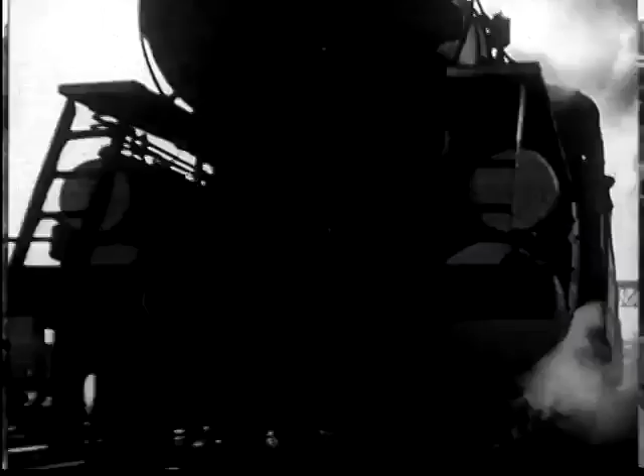Speed and still more speed. The breathtaking speed of the past is just poking along today. Faster trains, faster trucks, and motor cars speed up the work and play of the world. Each increase in speed follows the winning of a skirmish with speed's greatest enemy, friction.

And yet, strange as it might seem, speed is limited to our ability to stop, and stopping depends upon friction. What a paradox. Do away with friction for more speed, and yet for more speed, add friction.

Whether you travel on a bicycle, a wagon, or the fastest planes or cars, friction protects you, and your safety depends upon brakes, which apply friction for stopping. In modern busy traffic, on congested city streets, on the crowded highway, or in speeding along on the straight open stretches, the safety of men, women, and children depends upon brakes.

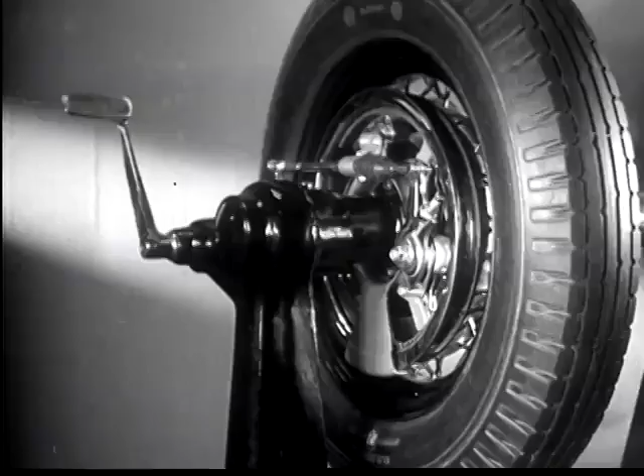No better example of dependable brakes can be found than those manufactured by the Chevrolet Motor Company. This is the Chevrolet wheel and brake. Notice how smoothly the wheel comes to a stop with the slightest pressure on the pedal, and how quickly the wheel stops when a sharp pressure is applied.

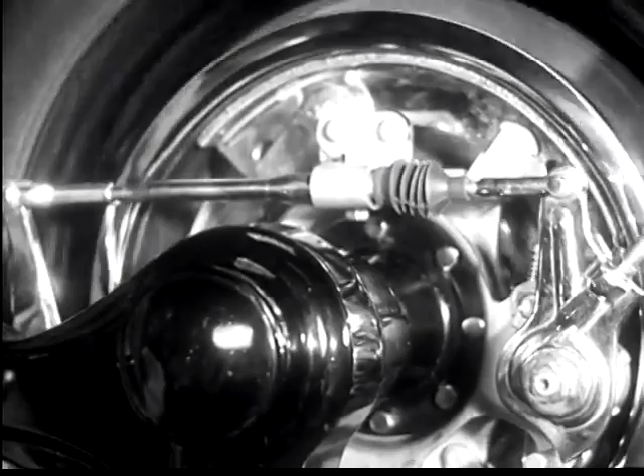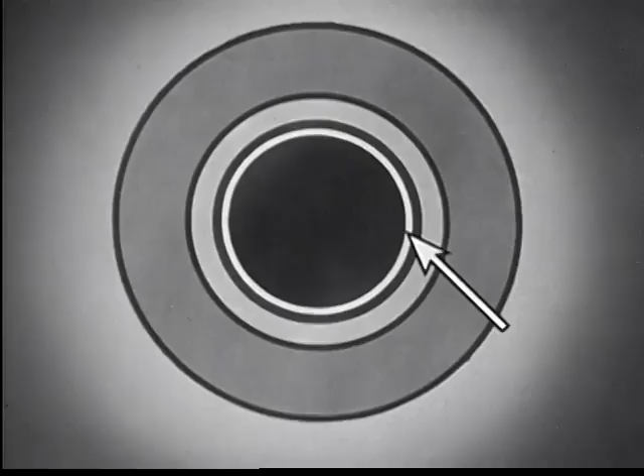Before we can appreciate the degree of perfection Chevrolet has reached in its brakes, we must understand how friction is used, what its habits are, and what must be done to take full advantage of it. This is a motor car wheel, and to this wheel is fastened a brake drum, the part to which friction will be applied for stopping.

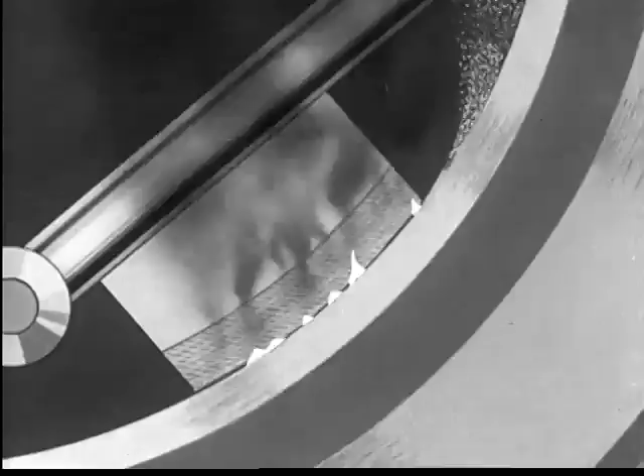Since friction produces heat, the material used for applying friction must resist heat. If it doesn't, it will smoke, char, burn, and quickly wear out. Chevrolet, with every available brake material to choose from, through exhaustive tests, has selected the very best for Chevrolet brakes. But regardless of the quality of the material, the way this material is used is more important.

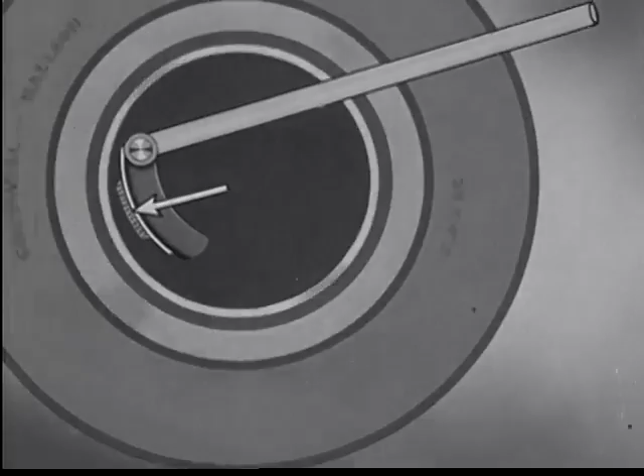For example, the amount of braking material in contact with the brake drum largely determines how long the material will last and how effective and safe the brakes are. Look at this. This motor car wheel is spinning and the brake drum turning with it. A short brake shoe covered with brake material will be used to stop this wheel. Now watch. See how hot the brake shoe gets and how quickly the brake material is ground away?

The brake shoe is lengthened. The brake shoe doesn't get so hot, and the brake material lasts longer. A still longer brake shoe, less heating, less wear. And now, almost half of the drum is covered with friction-producing brake material, and the wheel is brought to a stop with very little heat or wear.

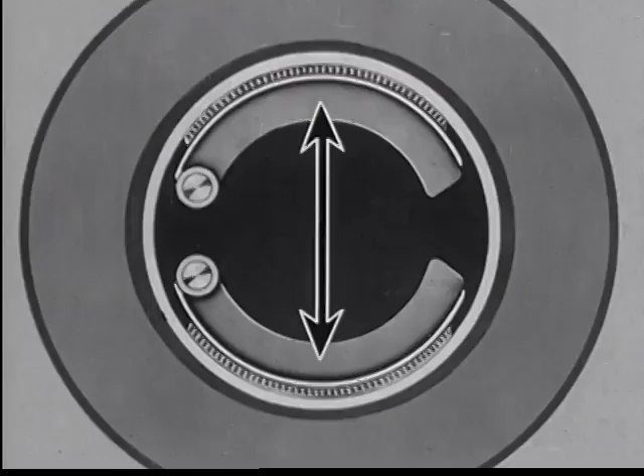It is a simple matter to see that the effectiveness of brakes and their durability depend to a large extent upon the amount of braking material in contact with the revolving brake drum, and the amount of braking material in contact with the brake drum not only depends upon the length and number of the shoes, but upon the diameter and the width of the brake drum.

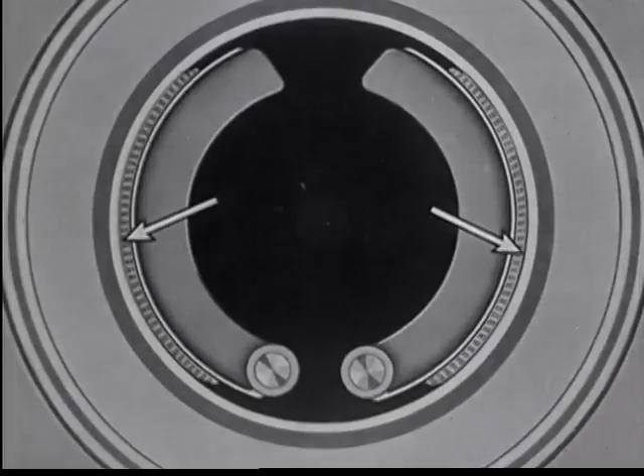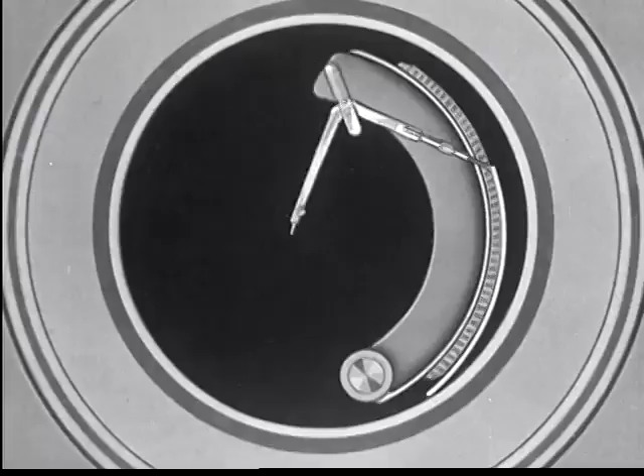Imagine a Chevrolet brake without articulated brake shoes, a brake which, from all outward appearances, applies plenty of brake material to the brake drum. But notice this. The ends of the brake shoes are fastened to fixed pivots. Watch as they move about these fixed points: the end of the shoe moves farther than the part nearer the pivot. As long as the surface of the brake forms a perfect circle, and as long as the pivot is located in exactly the right place, then all the brake material will contact the brake drum.

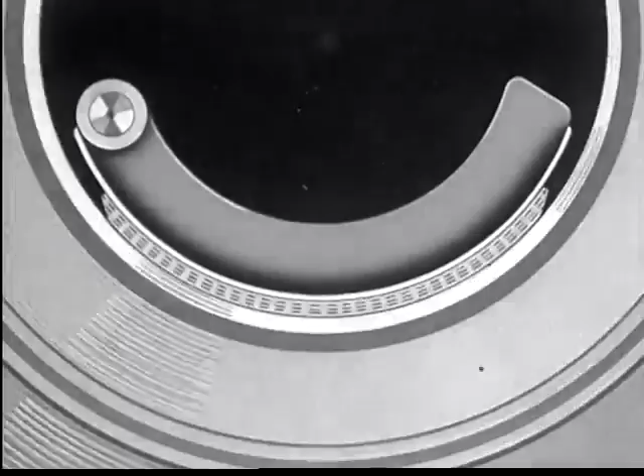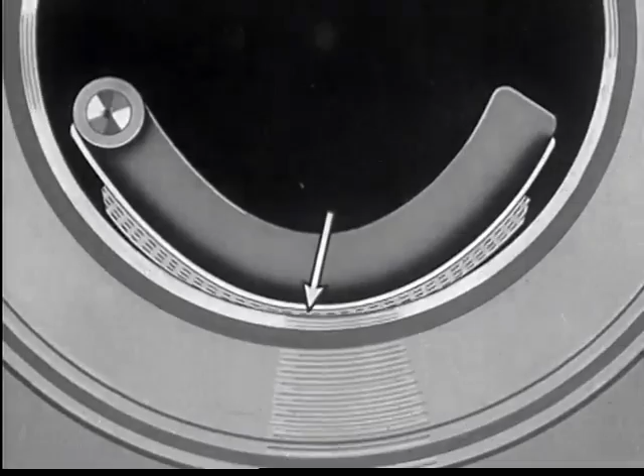But you can't use the brakes without making heat, and heat changes the shape of the brake shoe. See, this shoe doesn't fit the drum anymore. The rigid pivot won't let it, so only part of the brake material contacts the brake drum, and the part that does wears down first. When the brake shoe cools off, then here's what you get. Now only the ends of the brake shoes touch the drum, and only parts of the braking material are in

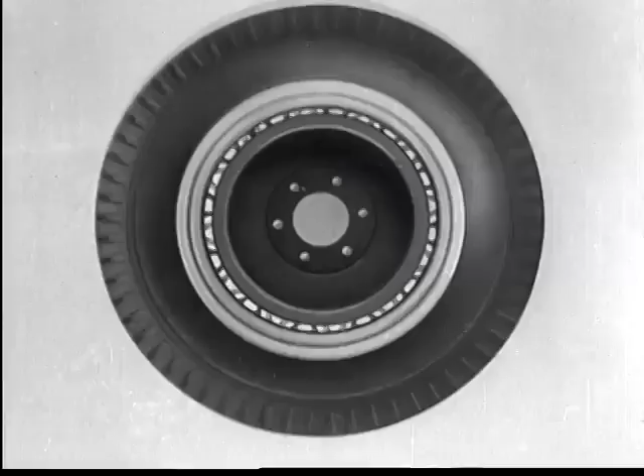contact with the drum. This is a Chevrolet wheel and its large brake drum, 12 inches in diameter. These are Chevrolet brake shoes. Notice how long they are, how much of the inside surface of the brake drum they cover. But even more important, notice how these shoes are supported. Instead of a single pivot, each shoe swings on a link with 2 pivots each.

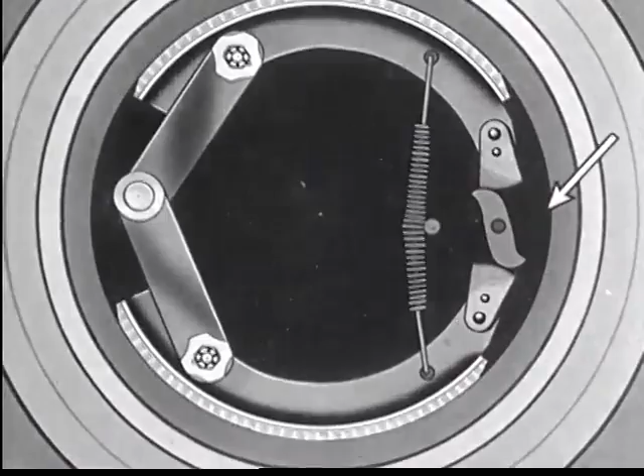Notice, too, that each shoe can move as it wants to and should within the circle of the brake drum. There is nothing to prevent each shoe from exactly fitting the brake drum, whether it's hot or cold. Now notice that this simple little piece, as it turns, spreads the outer ends of the shoes apart. As the brake operates, every square inch of braking material hugs the brake drum. Every square inch of braking material wears exactly the same.

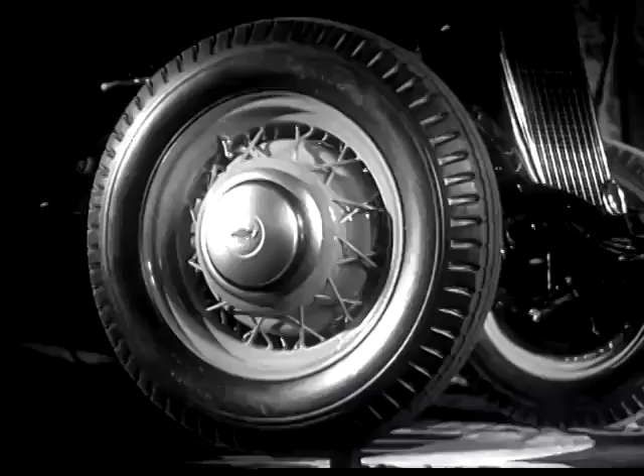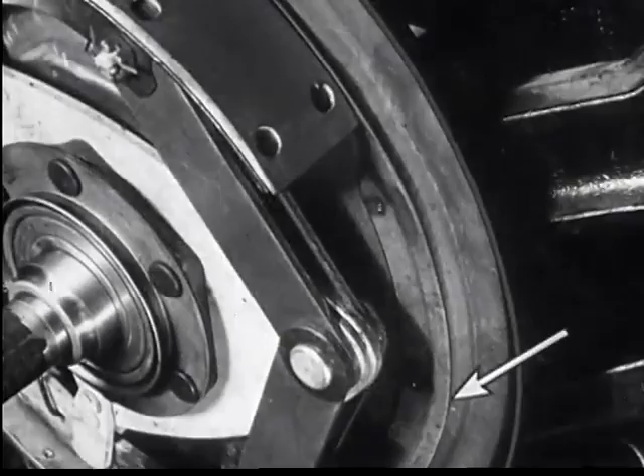This is one of the reasons why Chevrolet brakes work so easily, so effectively, and they stay in adjustment over thousands and thousands of miles of the hardest driving, through the heaviest traffic, and through any kind of weather. Regardless of how well a brake is designed, its moving parts must be protected from water, slush, mud, dirt, sand, dust, and grit. If they aren't, they can't stand up. This is why Chevrolet protects the interior of its brakes with this close-fitting shield, and in addition, protects the bearing parts against rust by plating them with cadmium.

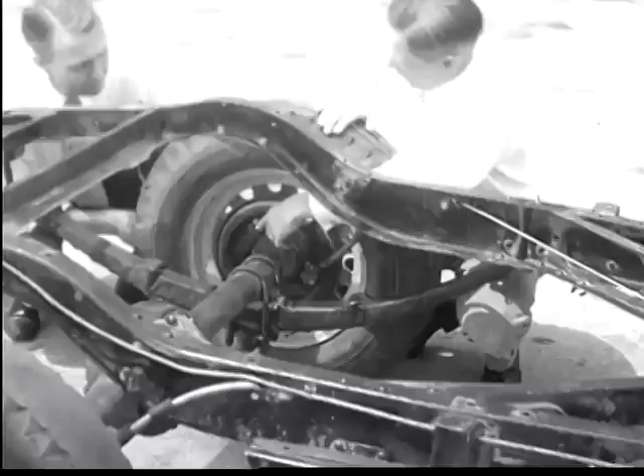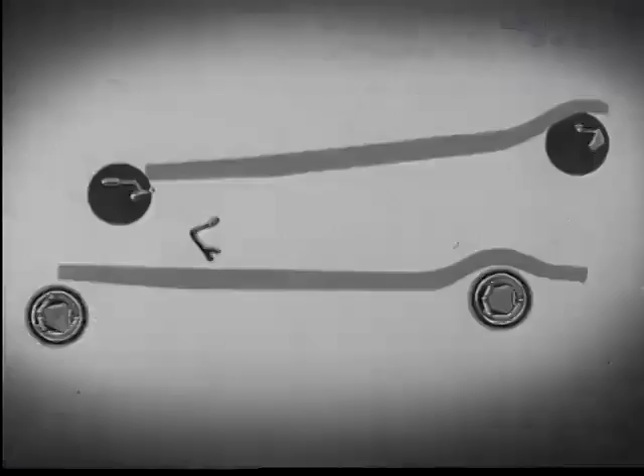With the inventive resources of experienced engineers in General Motors laboratories and the Chevrolet engineering department, Chevrolet has its choice of every available means for connecting brake pedals with brakes. After all, why should there be a problem in connecting 4 mechanical brakes with 1 foot-operated pedal? Simplicity is always a thing to be sought, particularly where safety is at stake.

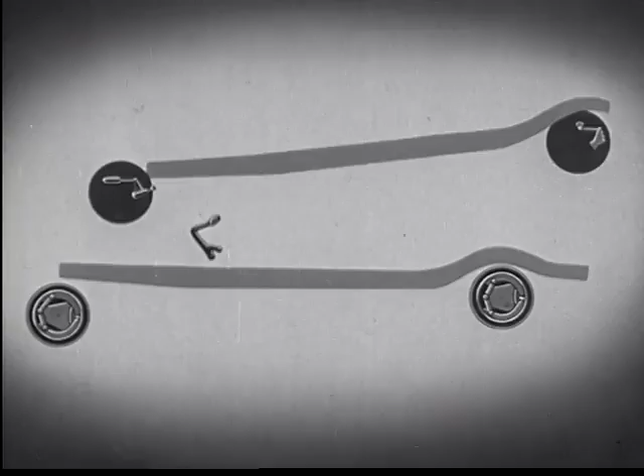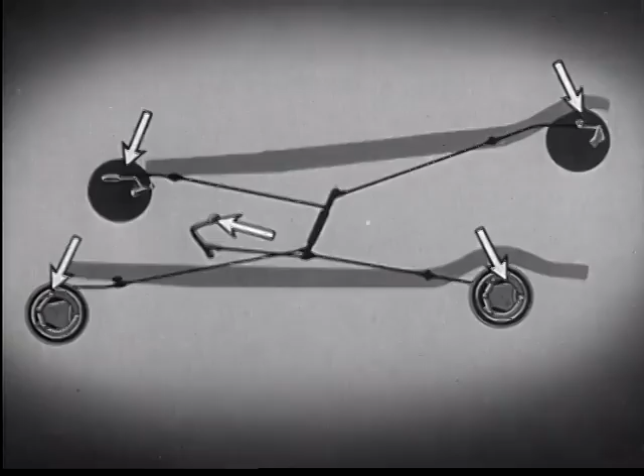So Chevrolet, with 4 strong steel rods and 4 strong steel cables, through a strong, sturdy cross shaft and link, connected its 4 mechanical brakes, mechanically, with the foot-operated pedal. What could be simpler? And what could be safer? A 300-pound man standing on a Chevrolet brake pedal could not even spring a single part in the entire brake system. And the reason is simple.

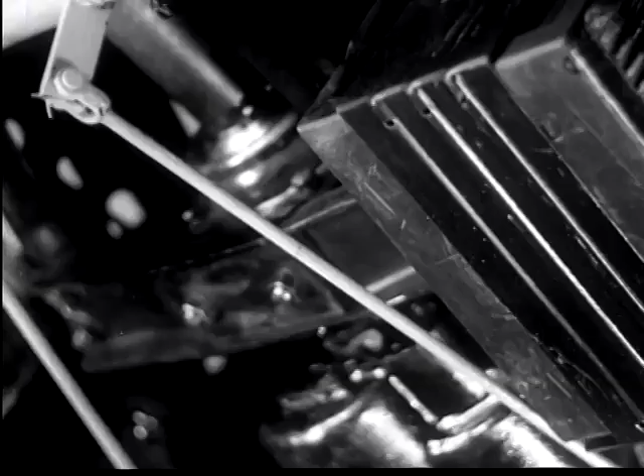The steel cables are of the same material used to lift heavy freight elevators, for operating steam shovels, and for supporting suspension bridges. In fact, here's an entire Chevrolet car hanging on just one of Chevrolet's brake control cables. Chevrolet's brake rods have a tensile strength of over 3,000 pounds, and the cross shaft and link is many times stronger than required. Is it any wonder that Chevrolet owners speed along without any thought of brakes?

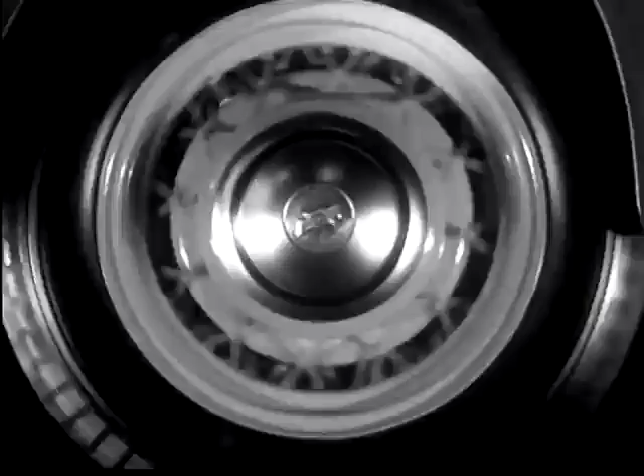The heaviest of traffic doesn't faze them, for they know from experience that their cable-controlled, all-mechanical brakes are on the job every instant, ready for any emergency. At the slightest push on the foot pedal, smooth, safe brakes that stay in adjustment for thousands of miles of safe travel. And all of this due to Chevrolet engineers' knowledge of friction, the enemy of speed, and yet the friend of speed.